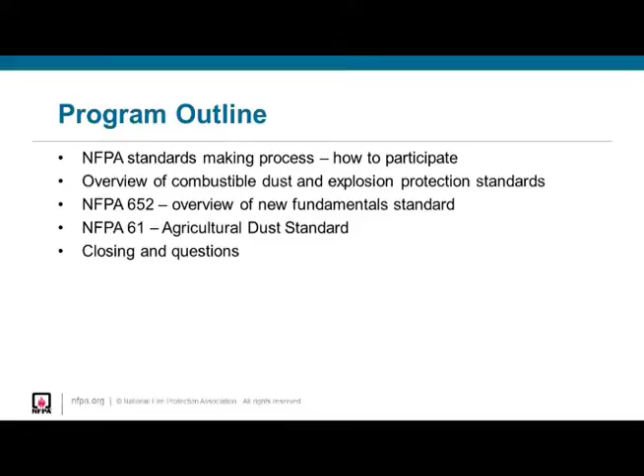Okay. NFPA stands for the National Fire Protection Association. We have a lot of acronyms. We have a lot of numbers. It's always good to know what your acronyms stand for. Again, National Fire Protection Association. We are located in Quincy, Massachusetts, which is the town just south of Boston. We've been around since 1896. We started out writing sprinkler standards. So again, we've been doing this a long time now.

We are a not-for-profit. We're not a government agency. I've had people ask me, oh, you're going to work for the government. No, I'm not. I've been at NFPA about 4 years. Again, we're an independent agency. Membership organization, we have about 60,000 members. So if you're a member of NFPA, thank you for supporting us. Members in 118 nations. For the most part, our standards are used in the U.S., but we do have more and more of an international presence.

We just sent a delegation to, not Saudi Arabia, the United Arab Emirates, UAE, and they're looking at using our standards, as well as I just got an inquiry last week from Singapore. They're looking at developing standards that look like our industrial medical gas standard, NFPA 55. So that's one of our priorities as an organization, to have more of an international recognition and more of an international presence.

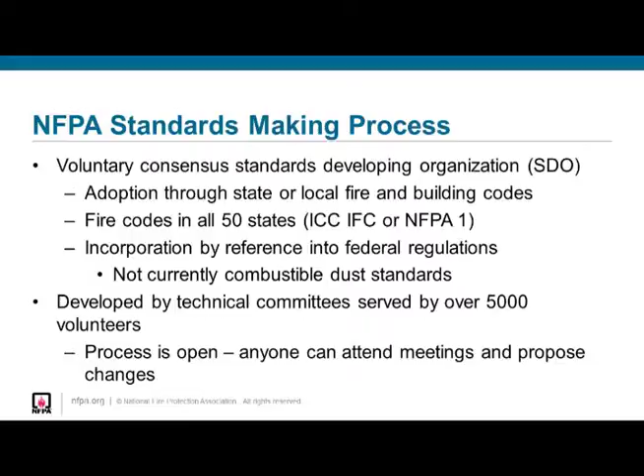Okay. All of our documents are available to be read for free. There's free access on nfpa.org. You'll go to nfpa.org, codes and standards, click on whichever standard you want to look at, and you can read it for free. You can't print it, you can't search it, but they're all accessible online.

Okay. Oh, and if you're interested in how a standard is moving through the process and you want to know when there's something new, you can sign up to get email updates, and you'll get an email when something changes. When we've posted minutes, we've posted a new version, when public input's available for review.

Okay, this is the list of our dust standards, the industry or commodity specific standards. Again, NFPA 61 is the agricultural and food processing. We also have a combustible metal standard. 654 is more of a general standard. It's meant to be chemicals and pharmaceuticals. It's evolved over the years into something that's more of a general industry standard.

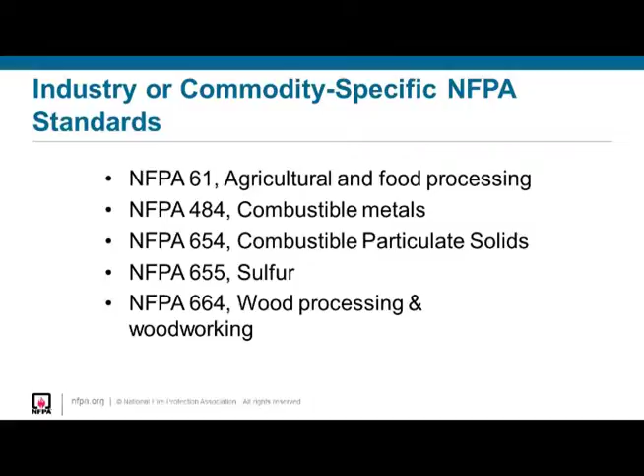We have a sulfur standard. It doesn't get a lot of use, doesn't get a lot of interest, but we still have it. It's important to people in that industry. And we have a wood standard as well.

The dust documents, combustible dust has been around for a long time. The NFPA standards haven't been around quite as long as combustible dust, but actually the ag dust standard dates to the 20s. 654 came about in the 40s. So with all these different committees, there's about 100 individuals on all these committees. There's a lot of overlap in terms of staff. As time evolved, the requirements became different in all the standards.

So about in 2010, 2011, about 5-6 years ago, we set up the dust project to have a correlating committee. The purpose of the correlating committee is to have consistency between the dust documents. So we've been working together on that since then, and this is how the project is structured. Okay.

652 came out last year. The fundamentals document, the new one, came out last September. The first draft meeting is next week. It's already back in cycle. It's on a 3-year cycle. It's already back for its next edition.

The 61, the ag dust, 654 and 664 were just issued in the last couple months. They're all available now on nfpa.org. I've got the new 61 here.

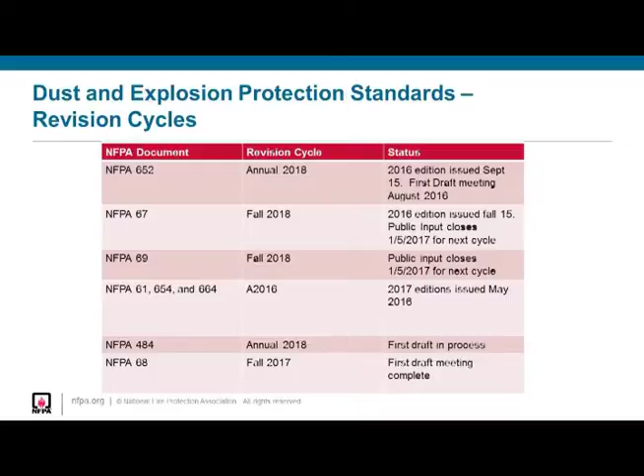Okay. Just talk a little bit about OSHA. Right now, there is no OSHA dust standard. OSHA proposed a rule in October of 2009. There's a national emphasis program on combustible dust.

We met with OSHA about a month and a half ago, and their plan is to have small business hearings on the combustible dust regulation in October. They do not plan to issue anything this term, which means that any rulemaking on combustible dust will be up to the next administration. So, again, it's hard to say what's going to happen with that.

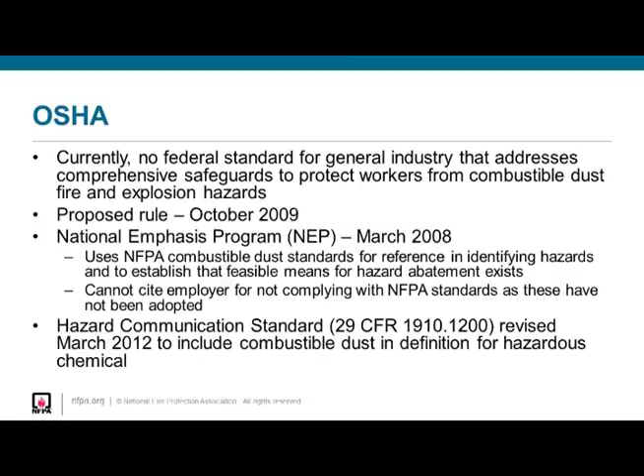Okay, so all of our dust standards have 3 fundamental principles. One is to control the fuel. What you want to do is limit the accumulation or formation of a dust. Sometimes that's hard if the dust is your product. But you want to limit the formation of it. You want to limit and keep it inside the equipment.

The next thing is to control the ignition sources, and again, this is outlined in all of the standards. Identify potential ignition sources and keep the ignition sources away from the dust. And if you do have an ignition, limit the spread of a combustion event.

And what the dust standards do is point you to the explosion protection standards. We won't tell you how to protect your equipment against an explosion, but we'll send you to the standards that do and tell you when you need to go look at the explosion protection standards.

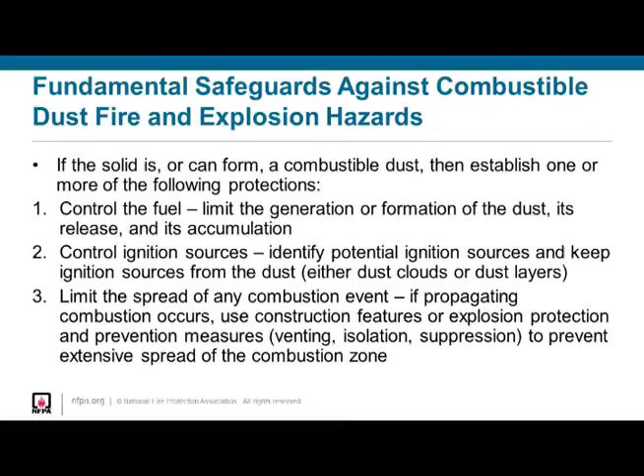Okay. Where do you find combustible dust? Dust collectors, grinders, hammer mills, blenders, silos, transfer points, rail car unloading. These are examples of places where dust is generated.

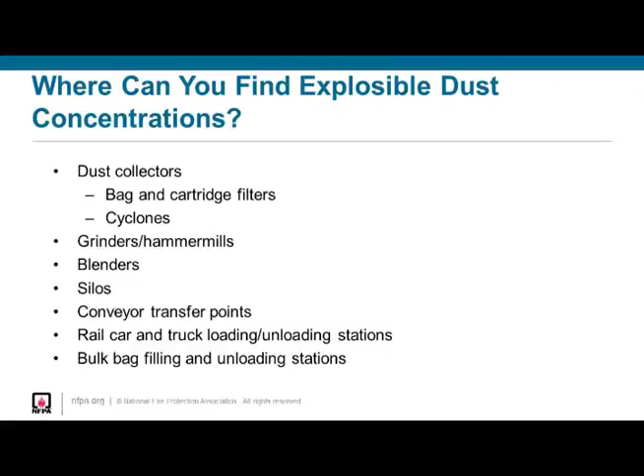Okay. I think everyone here has probably seen the explosion pentagon for dust. Let me see, there we are. Okay, so you start off with fuel. You need an oxidant in most cases. In almost all cases, the oxidant is air.

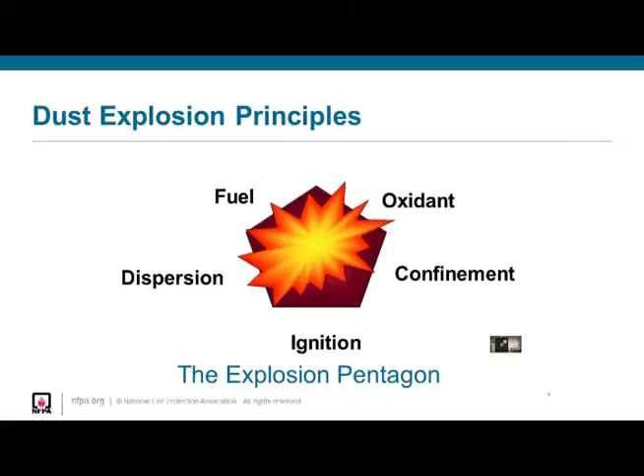And ignition. So these are three of the five elements in the pentagon, the same as a fire triangle. What you need for a dust explosion is a mechanism to disperse the dust, and then you need confinement here, and then you can have a dust explosion. Okay.

652 is the fundamentals document. Again, this document was put together by a new committee, started in 2010, 2011. The scope is to provide the basic principles and requirements for identifying and managing fire and explosion hazards of combustible dust and particulate solids. So this is the document that will contain the fundamental requirements, and all of the industry and commodity-specific documents will be implemented through this process. It will direct the user to those standards, for example, 61, for industry-specific requirements.

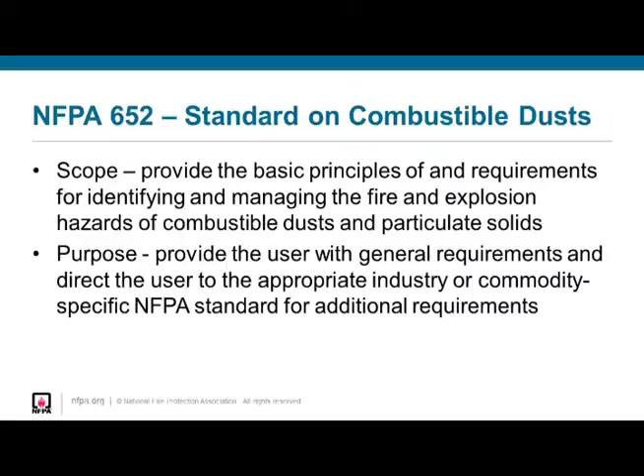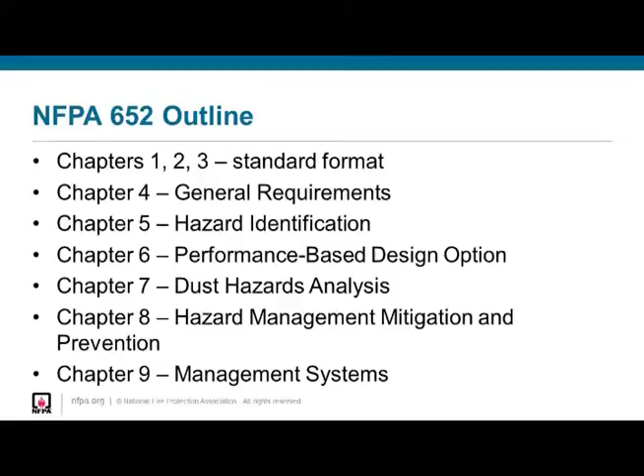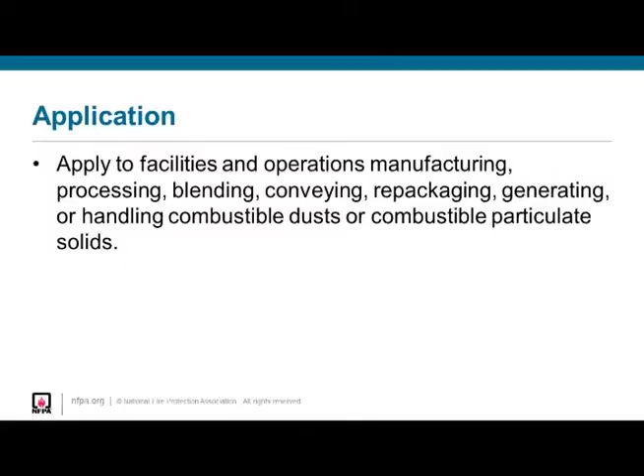Okay. The outline here in terms of chapters 1, 2, 3 are always the same in all of our documents. Chapter 1 is the scope, Chapter 2 is references, Chapter 3 is definitions, and this is how the document's laid out. Okay, this is the application. What I tell people is that it's important in any NFPA document to always start with the scope. Always start with Chapter 1. Know what it applies to. Know if it applies to your industry, your operation, your facility. And again, you need to go to Chapter 1 to do that. Equally important is to know what it doesn't apply to.

The new version of NFPA 652 has a table in the back that lists properties of common combustible dust. One of our committee members from FM Global, working with some industry representatives, pulled together a lot of representative data for combustible dust. I'm going to talk about that a little bit. One of the new dusts on the list is fudge brownie mix, which is my favorite combustible dust. It's not particularly combustible, but it is combustible and it's on the list. So, storage or use of consumer quantities: if you have fudge brownie mix in your pantry, you're not subject to 652. If you're a supermarket selling fudge brownie mix, you're not subject to 652. So again, you need to look at what it applies to and what it doesn't.

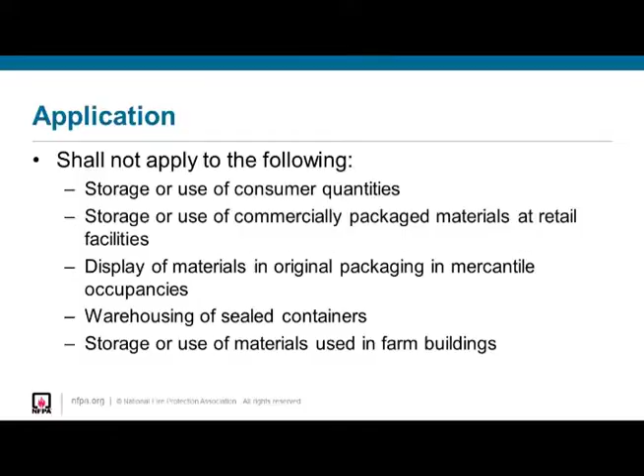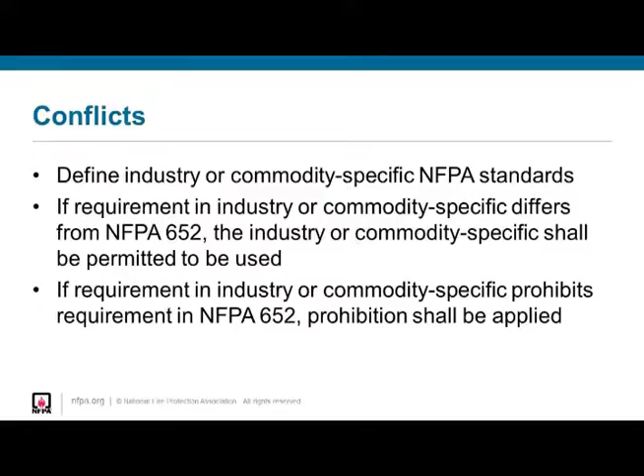Okay. One of the important provisions in 652 and the commodity-specific standards is the conflict provisions, and we spent a lot of time in all of the committee meetings going through this. The way the conflict provisions work is that if the requirement in the industry or commodity-specific standard differs from 652, the industry or commodity-specific standard shall be permitted to be applied. And shall be permitted to be applied is NFPA speak for may. Anytime you see that, that means may. We can't use may because it's not enforceable, so we say shall be permitted. If the commodity-specific standard prohibits a requirement, the prohibition applies. If the commodity-specific standard is silent, then the requirement in 652 applies.

The example I use for this is, say 652 says that you need to paint your dust collector. It doesn't say that, but who knows, maybe in a couple more cycles it will. If it does, and you're an agricultural dust facility and 61 says you have to paint your dust collector pink, then you have to paint your dust collector pink. If you're a pharmaceutical manufacturer and 654 says you are prohibited from painting your dust collector, then you can't paint your dust collector. If you're a woodworking facility and 664 says nothing, then you have to paint it, but you can paint it any color you want. I've started to get questions on the conflicts, and where the conflict provisions will play out is when we talk about dust hazard analysis in a few minutes.

Okay. There's a general statement on retroactivity in all NFPA documents, and basically what it says is that you need to build your facility according to the version of the standard that was in effect at the time you built it. NFPA does not expect people to rebuild a facility to meet a newer version of the standard. Your authority having jurisdiction may do that. Your insurance company may want you to do that. Your insurance company is an example of an authority having jurisdiction. Unless the technical committee has specifically decided that certain things need to be retroactive, and I'll go through what's retroactive and what's not. Typically those are management systems elements, safety procedures, operating procedures. Again, if you built your facility in the 90s, you're not required to bring it up to the most recent code.

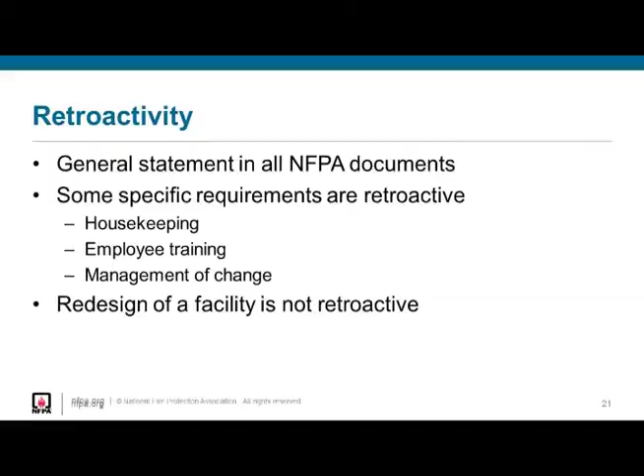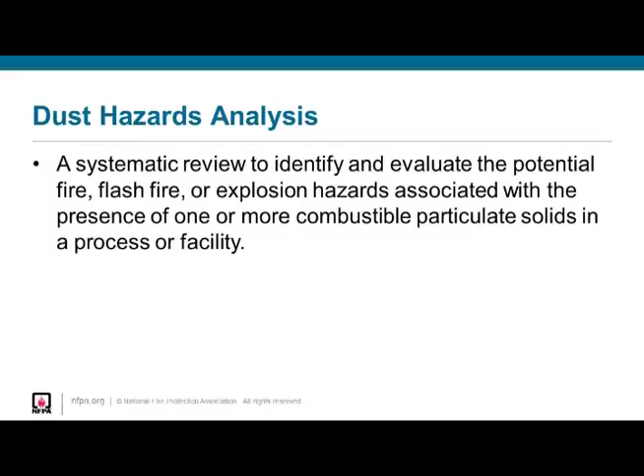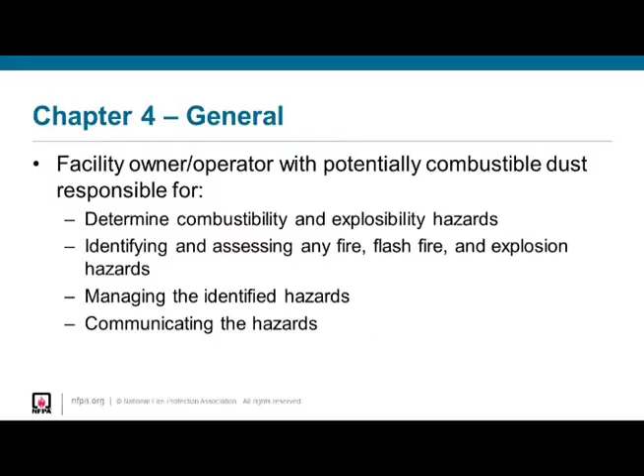What the standard says, and what 61 says as well, is that you are allowed to use historical data or facility data. You just need to make sure that data is representative of your material. So if you're using historical data in a table, it's your responsibility to make sure that's right. There's information in Chapter 5 on sampling plan, how to handle mixtures, how to get a representative sample.

Chapter 7 of NFPA 652 is requirements to perform a dust hazard analysis, and this is a new requirement in 652. This is where we had several challenges to the document at the annual meeting. This is what the challenges were about: it's about dust hazard analysis, and this is meant to be applied retroactively.

Requirements for dust hazard analysis have been in 654 and 664 for about 10 years, but they weren't retroactive. They are retroactive now in both those documents through the last revision cycle. When I get to 61, we'll go through the dust hazard analysis provisions there. This is the first time, in the 2017 edition, there's been a requirement for an agricultural dust facility to do a dust hazard analysis.

So 652 is meant to be applied retroactively. If you have a new facility or you make a modification to your facility that's subject to 652, you need to do your dust hazard analysis as part of that project. If you're not making any changes, under 652 you have 3 years to do your dust hazard analysis from the effective date, and the effective date of the standard was just about almost a year ago now.

I can tell you it's 5 years in 61, and it's only for specific equipment, so I'll get to that slide. And there is a statement in there that the 3-year deadline, or the 5-year deadline, or any deadline, is meant so you don't wait until 2 years, 9 months, 11 months, and 15 days. It's like doing your homework at the last minute, and it won't work. Trust me.

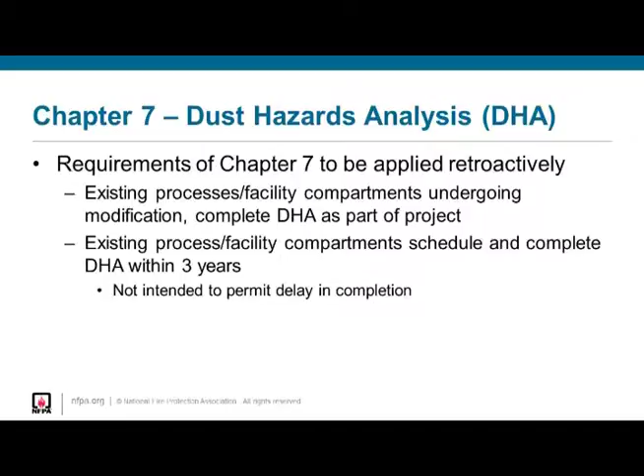Chapter 8 has all of the specific hazard management, building design, equipment design, and housekeeping provisions. One of the things the 652 committee is going to be looking at next week at the meeting is fleshing out some more of these requirements in 652. They'll probably come from 654, but it's one of the agenda items for the meeting next week.

Chapter 9 is management systems requirements, and the management system requirements are all retroactive. The whole chapter is retroactive: things like operating procedures, training, contractor safety, emergency planning and response, management of change, and document retention.

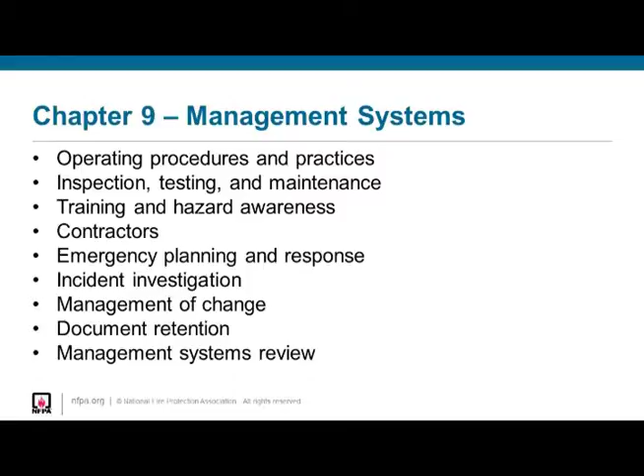61. I've got about 8 minutes here, but that's okay. This standard dates back to 1923. It used to be A, B, C — there were several — and they were pulled together probably about 10, 15 years ago, if not longer. So again, I have 10 minutes left.

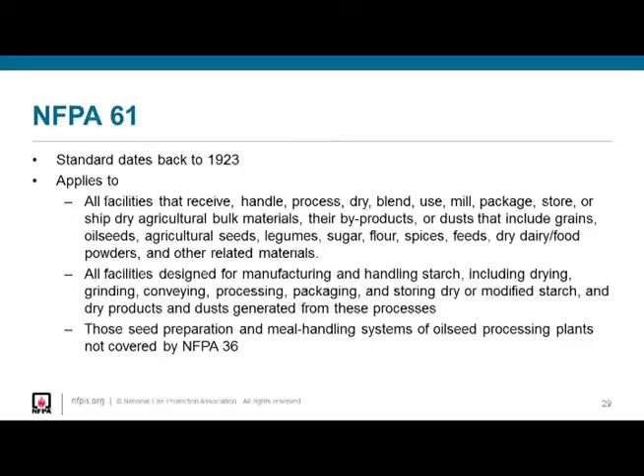What 61 applies to is agricultural facilities, facilities that handle starch, and seed preparation and meal handling systems that are not covered by NFPA 36. 36 actually has its own piece on dust. And what I'm talking about here is the 2017 edition of NFPA 61 that was just issued in the last couple months, so this is the new edition.

61 is the only document that reorganized according to the direction of the Correlating Committee, so I always put in a plug for the committee. The committee did a lot of work the last revision cycle, and they really did a substantial overhaul — well, not overhaul, they did more work than the other committees, and I always give them credit for that when I talk to the Correlating Committee.

So this is the outline, and it looks a lot like 652. One of the reasons for that — the Correlating Committee isn't just doing that to make the editors' and everybody's lives miserable — is that if you look at the conflict provisions, what it's meant to do is: if you have a requirement in 652 at section 8.x.y, you can eventually go to 61 and look at the same topic, then make a comparison and know which one you need to follow based on the conflicts. So again, the table of contents is identical to 652.

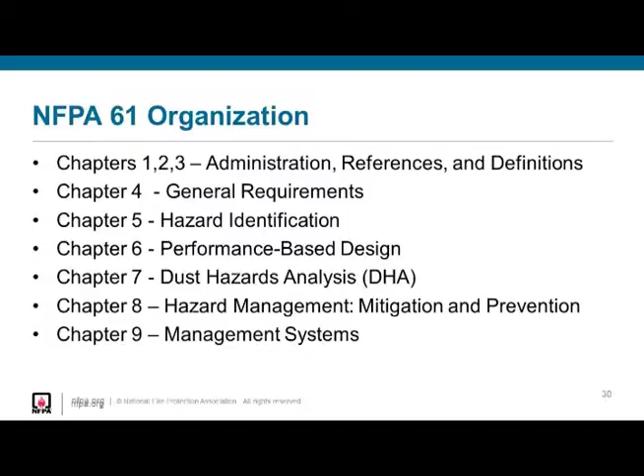What the committee did this past cycle through is a lot of work to correlate the definitions, so the definitions are the same throughout, moving to be the same across all the dust documents. Added material on what the owner-operator was responsible for, and worked on updating the objectives of the document to align with the other dust documents. The Correlating Committee task group recommended that all the dust documents have this set of objectives, and every single committee tweaked it a little bit.

And performance-based design is now an alternative. So Chapter 6 is performance-based design in NFPA 61, and that's an option for the first time in NFPA 61.

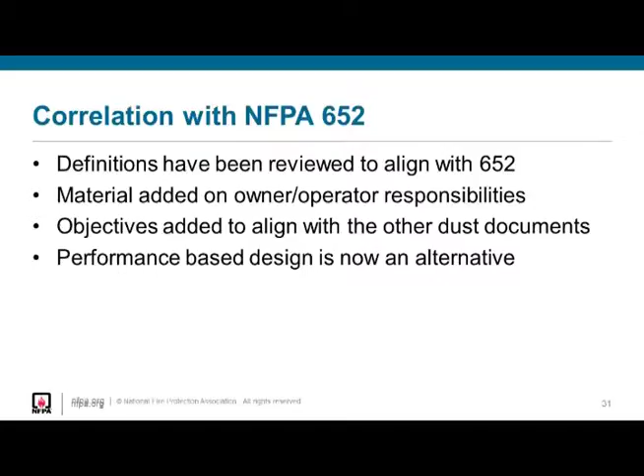Chapter 5 has material on hazard identification. Again, it's up to the owner-operator to determine if your dust is combustible or explosible, and you need to characterize your dust so you can perform a dust hazard analysis. Also, a lot of the testing you need to do is so you can design your explosion protection equipment.

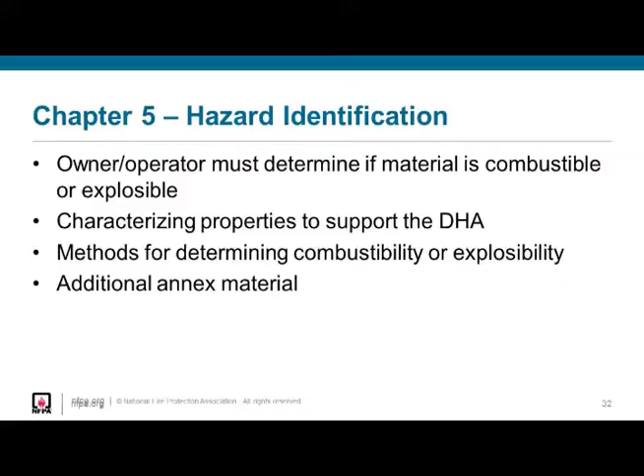Again, I talked about the annex material, additional annex material - that table has been revised extensively. Dust hazard analysis is in Chapter 7, so it's the same chapter, you can look at the two chapters.

The requirements apply retroactively. For new processes and those undergoing significant modifications, you need to do a DHA as part of the process. 61 defines a significant modification as something that exceeds 25% of the replacement cost of the system. That's a little different than some of the other standards. I think next time through, the other standards will adopt this definition because the Correlating Committee is basically directing them to.

If you are an ag dust facility, you're subject to NFPA 61, and you only need to do a dust hazard analysis on certain pieces of equipment: bucket elevators, conveying, grinding equipment, spray dryer systems, and dust collection systems. You have 5 years to perform that from the date of effectiveness or adoption of NFPA 61. I think the actual date is June that it became effective - I'd have to look again at the first page to get the actual date it was issued.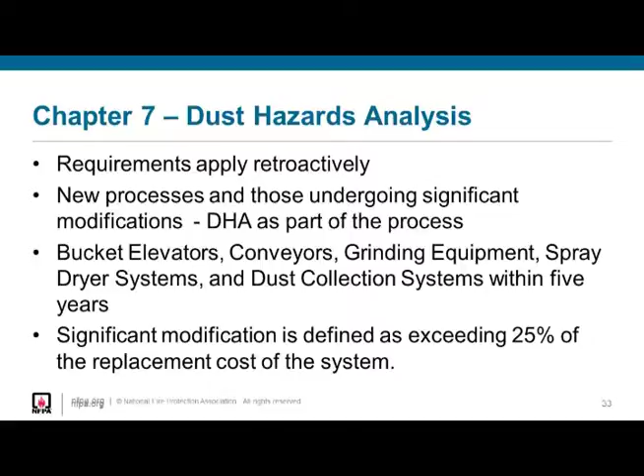The requirement is to evaluate hazards and provide recommendations to manage the hazards. It's required to be performed by a qualified person and be documented. There are a couple examples. We don't tell you how to do your dust hazard analysis - there are a lot of different techniques that can be used. It's not meant to be a PHA under OSHA 1910-119.

We made that as clear as we could throughout 652, throughout all the dust documents. There's an example in Annex B of 652 for a new process, and there's a checklist that can be used as an example. We're not saying you need to use it - we're just saying this is one way you can do a dust hazard analysis, which the committee added in Annex F of 61.

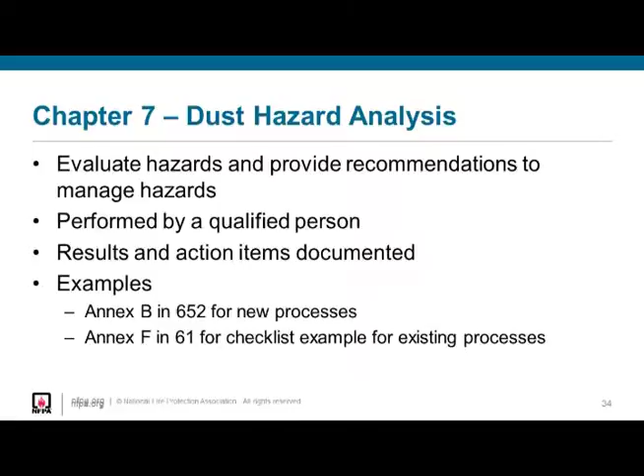Chapter 8 is where most of the standard went. Most of the material that was in the rest of 61 was reorganized and put into Chapter 8.

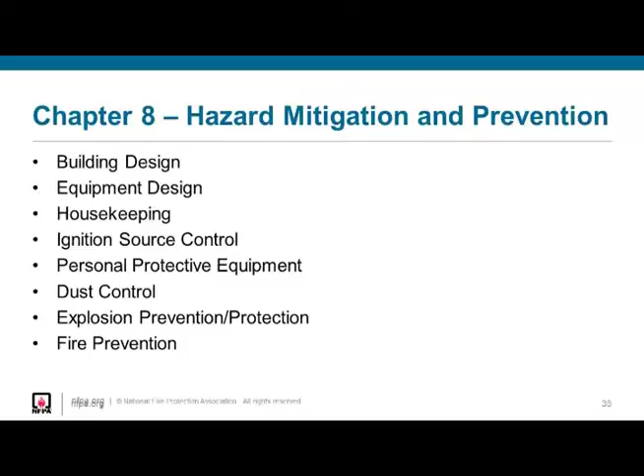Chapter 9 is the management system elements, and it's meant to be retroactive - there's a statement right at the beginning of it, so it applies to all facilities. This is the outline of what's in there. There are a couple other things than in 652 - things that needed to be brought in and needed a home, like storage of oils, flammable liquids, warning signs, and miscellaneous storage, all part of Chapter 9.

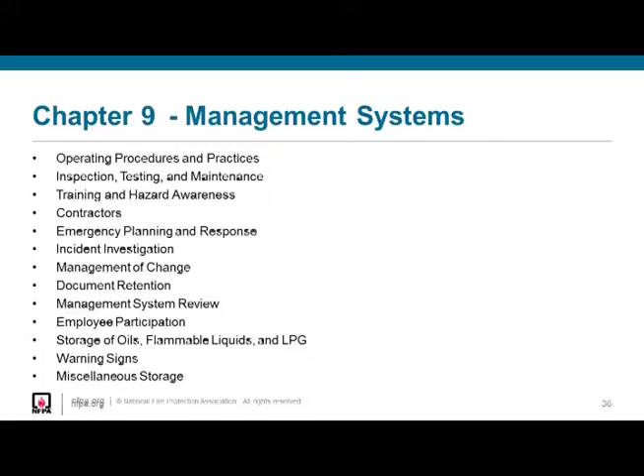The next steps - people ask us all the time if we're going to have one document, one dust document someday, and I think that's really up to the technical committees. I know each committee has their own objectives, their own personality. I know 61 wants to be a standalone document that you don't need to use 652 with it. From my experience, just trying to get all the committees to look at the objectives and having them all do it differently, I can say it probably won't happen in my career.

But I think it depends on what the committees want, and it depends on what the users want. I think the documents will be more and more like each other, creating less confusion within the industries - not just the agricultural industry, but everywhere - about what am I supposed to do, what am I supposed to use. This says one thing, this says the other - combustible dust is defined differently. So you'll see the process, the Correlating Committee is starting to take effect, and things are starting to look a lot more like each other, at least be organized like each other.

And again, the finished second draft - everything's going right back into cycle again.